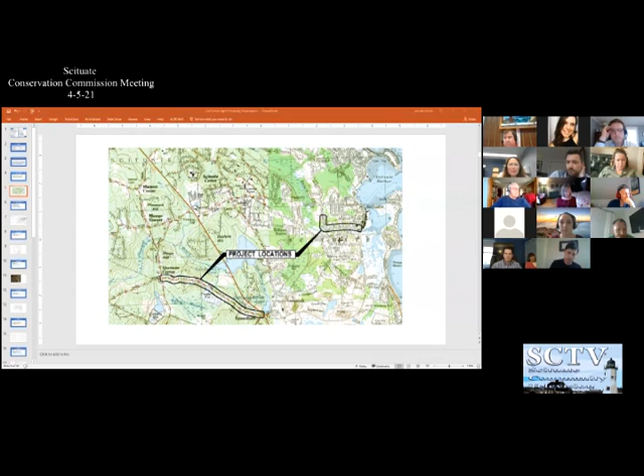I think I saw Jeff. Oh, Jeff, there you are. Oh right, thanks Amy. Jeff Hassett here with Morse Engineering, here on behalf of the applicant, Stephen Connolly.

As you noted, this is a continued hearing for an RDA for 215 Tilden Road. Since the last meeting on the site plan, we noted the existing buildings to remain, and then also extended the wetland line towards the easterly property line. That wetland line did come closer to the work than we originally had.

The work in the 100-foot buffer includes 3 sonotubes associated with the deck on the back of the house. A corner of the garage is partially in the 100-foot buffer, and the septic system is within the 100-foot buffer. I'll note that all work is within areas that were previously disturbed. There's no work within the 50-foot buffer, and along the limit of work, there will be a 12-inch diameter mulch sock.

Okay. Penny, I think you're anxious to discuss this. I just feel it's so. Go ahead, okay I'm up.

Yes, it's changed. This whole project to me has changed from the first time it came in. I now have changed my feelings completely on an RDA, because the whole septic is in the 100-foot buffer, which is our jurisdiction. I know it's local, but it is ours. I was shocked, to be honest with you, how much the line changed. So that's about all I can say. I am not happy with this as an RDA at this point. I'm not comfortable with it. That's it.

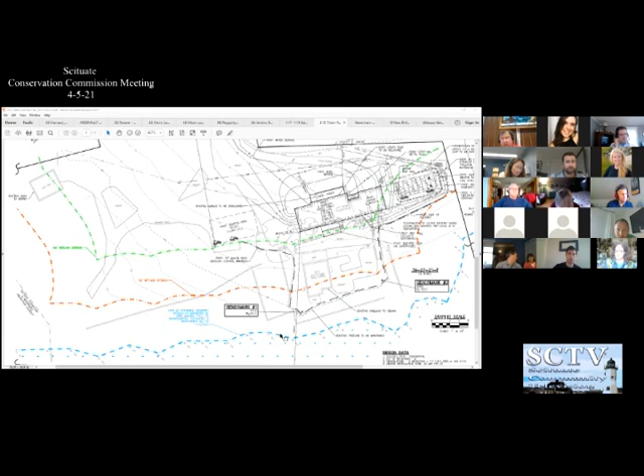25 Harvard Street, April 5th during the 5:30 meeting, the Town of Scituate Conservation Commission will act on the request of Kevin Arsenault for a determination of applicability of the Massachusetts Wetlands Protection Act and the Scituate Wetlands Bylaw for activities related to installing a fence and landscaping at the property known as 25 Harvard Street, Scituate. Abutters and other interested parties are invited to attend. Information and access to virtual meetings is available on the agenda posted on the town website.

So this is Atlantic Coastal.

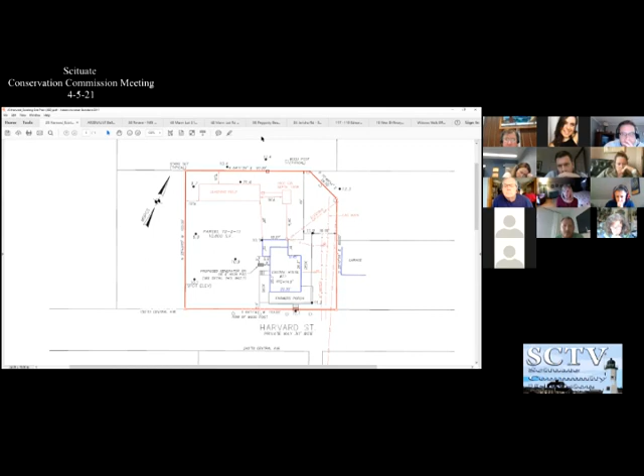Could you scroll to the second sheet that shows the proposed landscaping? It was there, but it went away. There it is, oh, there it is.

There's all kinds of wonderful plants here. Love is the expert on the plants. Love, are you on the call? Can you hear us? I am here, can you hear me? Yes, great. Do you want to talk through this qualitatively on some of the plants and the layout, and then we can open it up to questions from the conservation commission? Sure, I'd be happy to.

The Arsenaults are new owners of this Humarock property. What exists there now is, across the front, some leftover rugosa rose. There are two nice trees, one a Juniperus virginiana and the other a Pinus rigida, and they're quite lovely. There's some Prunus maritima, which is really nice, but everything else is basically just weeds, as well as burning bush and oriental bittersweet. So they want to keep it very beachy and very appropriate to the area.

The fencing that was proposed at the back right and also along the left property line has currently been eliminated. They want to see what their new neighbors to the left are going to do first, and they didn't want to feel like they were walling them out — they're actually really nice people. They want to add some Juniperus virginiana at the back, which will help screen their view to an area where there are 10 to 12 parked cars most of the time. The area behind them to the left is already wooded, primarily beach plum and Juniperus virginiana.

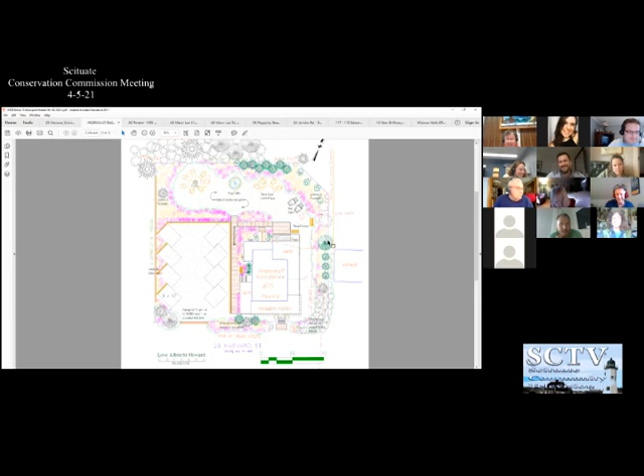Good luck with your project. Thank you very much. Can I say one thing to Doug Aberg? Sure, okay. Doug, we've never met, I just wanted to say hello. Thanks, that was it - I was going to wonder if you caught on that was me, with a voice. Thank you, everyone. All right, thank you, have a good night. Have a good night. I've got fans everywhere. I guess you do. Ooh. Wow. I was wondering what she was going to say. I was scared for a minute.

Zero Glades Road, April 5th, 2021 hearing, at Town Hall, the Scituate Conservation Commission will act on the request of Kevin McGovern for a determination of applicability of the Massachusetts Wetlands Protection Act and the Scituate Wetlands bylaws for activity related to removing two structures at property known as Zero Glades Road, Scituate, Mass.

Abutters and other interested parties are invited to attend. Information to access the virtual meeting will be available on posts on the town website.

Do we have any kind of a sketch or plan for that, Amy? Here we go. Okay, and who's presenting this? I was looking for Kevin. I think he's a traveler, potentially. There he is. Great, hi Kevin. You're muted - hold on, you got it. Oh, hold on, unmute. Oh sorry, I think I muted him. Give us one second. How about now? We got you.

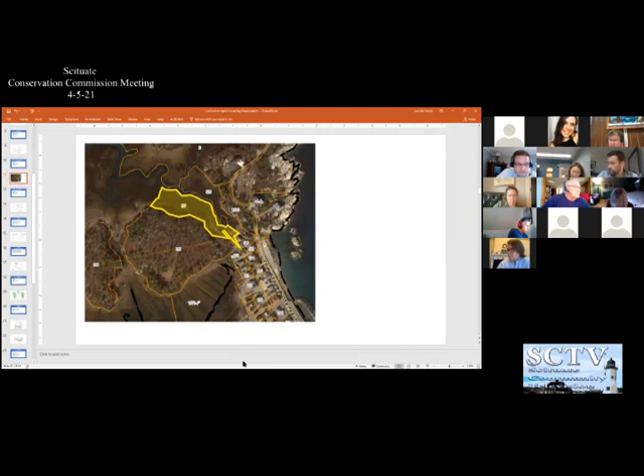Okay, 22 Salt Meadow Lane. During this 5:30 meeting of the Town Hall, the Scituate Conservation Commission will act on the request of Leo McDonough for a determination of applicability of the Wetland Protection Act and the Scituate Wetlands bylaws, for activity related to bringing fill to level a boat storage area on property known as 22 Salt Meadow Lane, Scituate. Abutters and other interested parties are invited to attend. Information to access the virtual meeting will be available on the agenda posted on the town website.

Who's on for this? Anybody? I'm looking for Leo McDonough. If he's on the call, can you raise your hand? Otherwise I can just quickly go through what's on here, it's pretty straightforward. Somebody's raised their hand. We got Mr. McDonough, can you see him? This is Jody.

Yes, so good evening. I apologize, I'm not at home, so I'm not on my computer. Sure. Why don't you explain to us what you want to do, Mr. McDonough? Sure, so I've had this property, the two lots, one house, about 15 to 16 years.

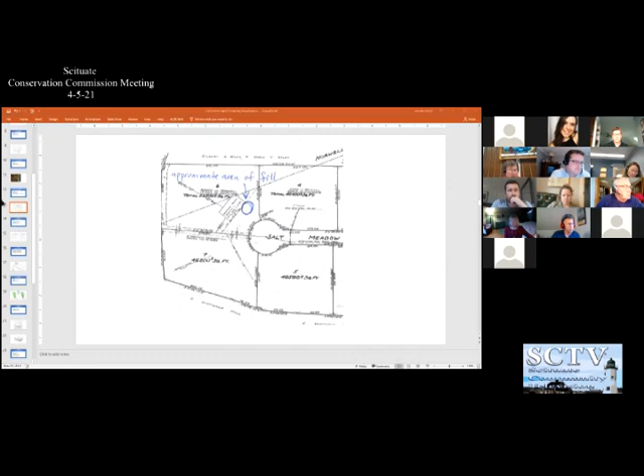Into the NOIs. 117-119 Edward Foster. On April 5th at 5:30 at Town Hall, the Scituate Conservation Commission will hold a wetlands hearing under Chapter 131, Section 40 of the Massachusetts General Laws and Section 30700 Town of Scituate Code of Bylaws, regarding the application of the Town of Scituate for work related to extracting 20 existing mooring piles, anchoring the maritime center floats, and replacing with 26 new steel pipe mooring piles at location 117, 119 Edward Foster Road, Scituate. Abutters and other interested parties are invited to attend. Information to access the virtual meeting is available on the agenda posted on the town website.

Okay, looking for GEI to raise their hand, and Stephen Moan. Okay, you're all. Who have we got on? Host is not allowing me on. There he is. Are we there? Somebody, I can hear somebody. Yeah, we control the mute, so. He's down the bottom of the screen, and he's muted.

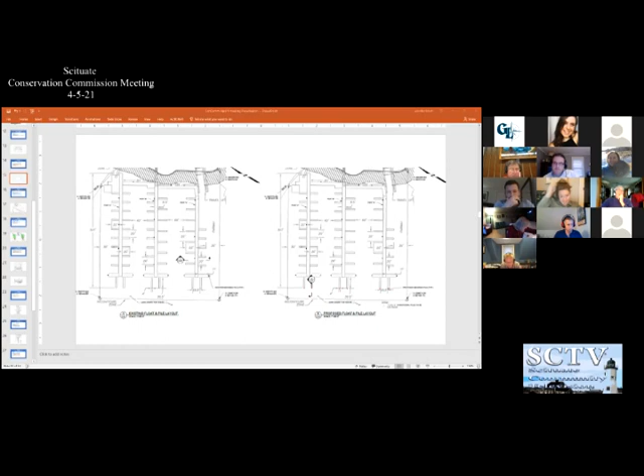On April 5th, 2021, the Town Hall Scituate Conservation Commission will hold a wetlands hearing under Chapter 131, Section 40 of the Mass General Laws, Section 30700 Town of Scituate Code of Bylaws, and Section 32050 of the Scituate Stormwater Bylaw regarding the application of the Town of Scituate to repave the parking lot and associated landscaping at location 250 Driftway, Scituate. Abutters and other interested parties are invited to attend. Information and access to the virtual meeting will be available on the agenda posts on the town website.

So who do we have? That's Cavanaro. Yes, Brendan Sullivan here. Hey, Brendan. Oh, I thought they were going to continue. Go ahead, Brendan. We do have the updated plan up.

Brendan Sullivan with Cavanaro Consulting, representing the Town of Scituate, the Widow's Walk Golf Course. We were in here with you guys at the end of last year for improvements to the clubhouse, and said we were coming back when we redid the parking lot. Well, now we're coming back to redo the parking lot.

So the parking lot is basically a combination of pavement, old pavement, and some hard pack gravel. In conjunction with redoing the clubhouse, we're going to grind and repave the parking lot, really not changing the grades that much, other than the grinding of the existing pavement and the new pavement going on top of that. What we did include on the original plan was...

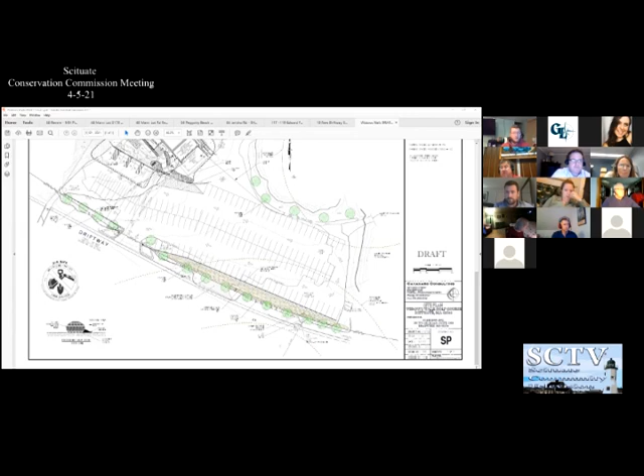13 Circuit Ave. On April 5th, 2021, at 5:30, Town Hall, the Scituate Conservation Commission will hold a wetlands hearing under Chapter 131, Section 40 of the Massachusetts General Laws, and Section 30700 of the Town of Scituate Code of Bylaws, and Section 32050 of the Town of Scituate Stormwater Bylaw, regarding the application of Derek Delmonico to raze and rebuild a single-family dwelling with attached garage, asphalt driveway, and lawn area at 13 Circuit Ave, Scituate. Abutters and other interested parties are invited to attend.

And we have Scott Panera here. Good evening, this is Scott Finara with Grady Consulting, here on behalf of Derek Delmonico for notice of intent for raze and rebuild. On the left side of the screen, that's the existing conditions of the property. There's an existing single-family house and driveway. The property does abut Scituate Harbor, which has a coastal bank. Part of this work will be within 100 feet of that resource area.

So again, it's just a raze and rebuild. We have submitted an administrative stormwater review for low impact projects, which has been peer reviewed by Merrill, and we have addressed their comments. There's a stormwater system to the rear of the house, just below the patio on the right side of the screen. We're proposing erosion control in the form of a silt sock around both the left and right side of the property, as well as the rear where the work will stop. Are there any questions?

Who wants to lead off? Jen? I'm still looking at it, but my first thought is there's a pretty big uptick in impervious surface. Can you say what the actual percentage is? Yep, I believe there's a table on the right-hand side above the revision block. But essentially, the entire increase in impervious coverage will be managed by this new stormwater system.

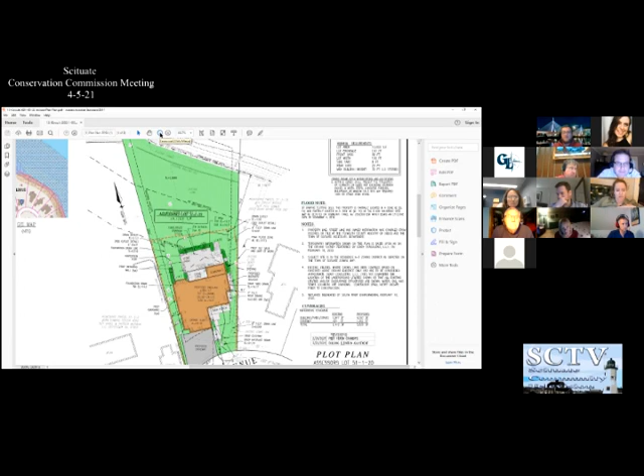Okay, it looks like Derek and Tracy have their hand raised. They might be able to input. Well, why don't we go through members first, and then we'll have public input and the owners. Let's just work through that one. Okay, that way we can hear from all the members. Okay, all right. Andy?

I think Jen's point's well taken. But otherwise, it looks like they pretty thoroughly responded to the concerns I saw in the peer review. So I'm good otherwise. Okay, Brendan?

Yeah, I'm also concerned about that's a large increase, but Jen kind of really did that. Not overdid it, but like she covered it completely. I meant covered it completely. She just - I took the bullet by going first. Okay, Penny?

I have a question here. In the back there it says stone patio, but what's that staircase? Is this a raised deck or a stone patio out back? Yes, it's a raised stone patio. So there's steps down from the first floor elevation onto that stone patio, and then beneath that is the proposed infiltration system.

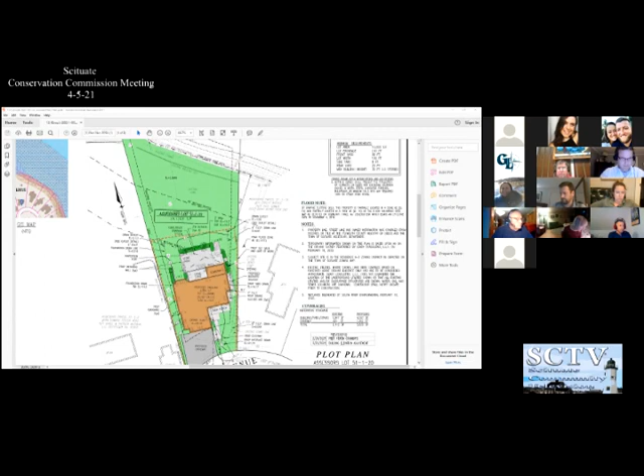So on April 5th, 2021, 5:30 p.m. at the Town Hall, the Scituate Conservation Commission will hold a wetlands hearing. Hold on, 10 Driftway, 10 New Driftway. Right, it's probably out of order. Sorry, and this is out of order on the slideshow, but on the agenda we're doing 10 New Driftway first.

So, we are looking for Morse. Is this a new one? No, it's continued from the 1st of March. Oh, okay, that's why I don't have anything to read. Sorry, 10 New Driftway, of Ross Engineering. I thought they were going to... It's Ross, I was thinking it was Greg Morse. It's Ross, you're right, sorry. I don't know why I was so confused. Too much going on.

Good evening, Mr. Chairman, this is Greg Tansley. Can you hear me? I can, Greg. Go ahead and turn it. Yep. Greg, if you want to start your presentation.

Sure. What we have here, as you can see, there's an existing retaining wall that runs right along this line. That retaining wall is in great disrepair. It's an old Versa-Lok retaining wall. It's been hit by traffic and cars parking a number of times. What we're looking to do is remove this old retaining wall that's really in bad shape.

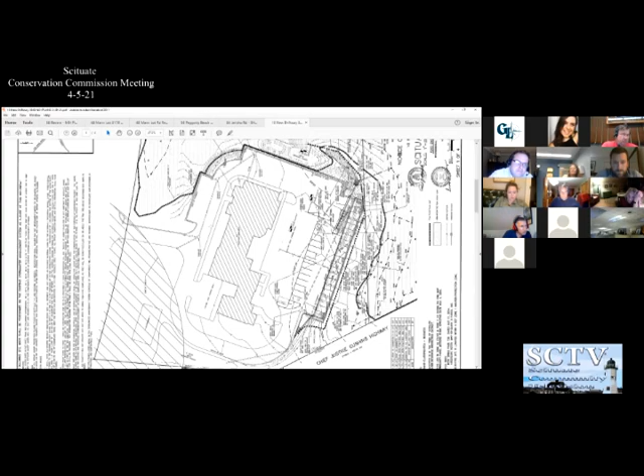If you see on the plan, there's a 1 with a circle in one of the stalls, and that goes up to 15 with a circle in one of the stalls up by the new island. That's a row of... Now I can see what you're doing. Yeah, so that's one new row we are proposing for new parking. And then if you look to the south, there's a 16 in one of the parking stalls in the lower corner, and then we go all the way up to 35. But there is existing parking along that edge already, so it's...

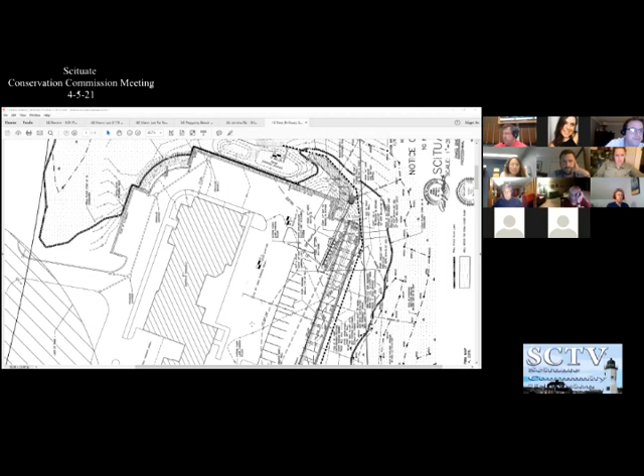38 Revere Street. On April 5th, 2021 at 5:30 p.m., the Town Hall Scituate Conservation Commission will hold a wetlands hearing under Chapter 131, Section 40 of the Mass General Laws, and Section 30700 of the Town of Scituate Code of Bylaws, regarding the application of John Ison for building an accessory dwelling on timber piles located at 38 Revere Street, Scituate. Abutters and other interested parties are invited to attend. Access to the virtual meeting will be available on the agenda posted on the town website.

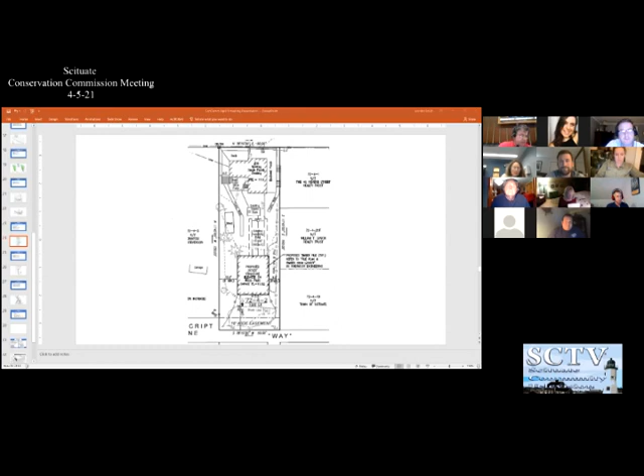Good evening, this is Morse Engineering. Yep, this is Greg. Sorry Greg, I thought you were on the other one, but I was confused. Not a problem. For the record, this is Gregory Morse, registered engineer, Morse Engineering, representing the property owner John Ison, on the notice of intent located at 38 Revere Street. The notice of intent is associated with the construction of a detached garage at this property.

The existing property, shown on assessor's parcel 72-4-2, is approximately 7,500 square feet in size, represented by the thick black line, that's the rectangular shape on the plan. At the top of the page is Revere Street, at the bottom is Postscript Lane. At the Revere Street end of the property is the existing home, number 38. The site is located not only on a barrier beach in Humarock, but also in land subject to coastal storm flowage, FEMA zone AE 13. For reference, at the Postscript Lane end of the site, the topography is at elevation 15. At the Revere Street end, the elevation is approximately 11.

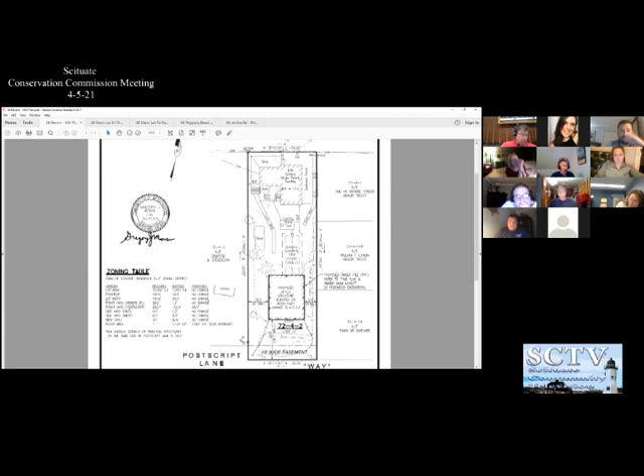The proposal is to construct a detached garage, 26 feet wide by 32 feet deep. That's the bold rectangular structure at the bottom third of the page. It would be an elevated structure on timber pilings. We submitted a piling layout prepared by Rivermore Structural Engineers. We've proposed a first floor elevation at 15.5, which is above the FEMA floodplain elevation of 13. The DEP had no technical comments and has issued a DEP file number. This project also went to the Zoning Board of Appeals and received unanimous approval. I'll turn it over to you for question or comment.

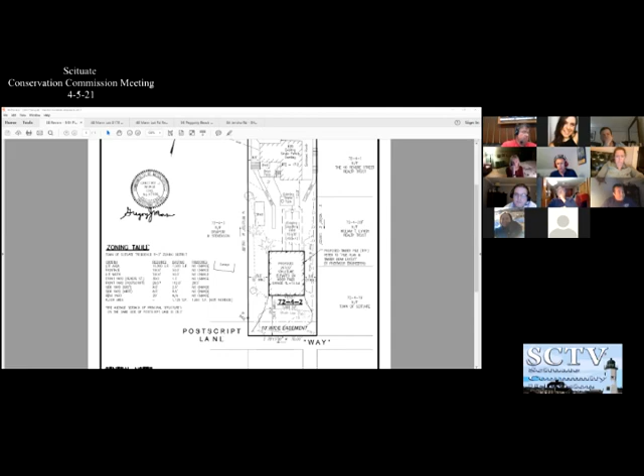Thanks Greg. The speaker admits they wish they had those plans and didn't realize they were missing. They note this is barrier beach, coastal dune, land subject to coastal storm flowage, and suggest they could close this pending the structural plans.

A question is raised confirming this will be an accessory structure, and whether there's an additional connection to the septic system, and if there's enough capacity to handle extra flow. It's clarified there's no increase in flow since no bedroom is proposed; this is a single family home attached to the septic system and this does not add bedroom capacity. They've been in touch with the Board of Health, who are comfortable with that.

Regarding the structural plans, the speaker says he understood they had them, but in case not, he just emailed them to both the reviewer and Jen Smith. This is acknowledged with thanks.

Craig asks how people accessed this property before, noting the house fills up all of Revere Street, and whether people just park on the street. It's explained that they come in off Postscript Lane, where the proposed area is currently a barren gravel surface, and they already park in this location.

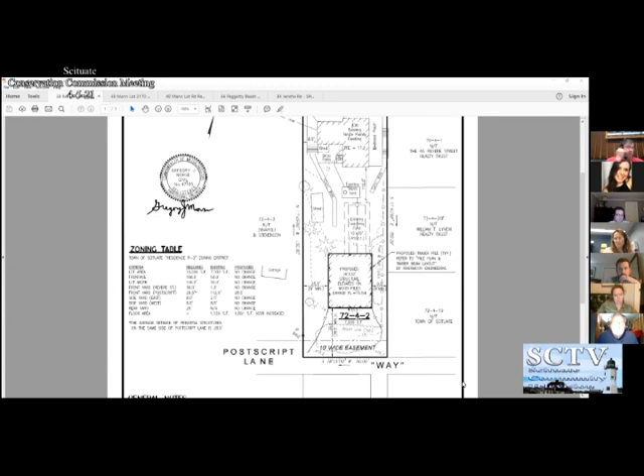The one that would be really natural is on what I think is marked as a 10-foot strip. There's already some vegetation there. We would want to keep as much of the bayberry bushes, how to describe it, to the right, just above the word way, if we can, and maybe have it sweep in and extend it. You can see there's some posts along there. That would be a natural place to put some bushes or move them if we can.

Well, I think if we agree to close this, John, then part of one of the orders would be that we'd come up with a planting plan that the commission could agree on. Yeah, I'm sure we can. Okay, yeah, that was good. Great, thank you. Okay, anybody else?

We need a motion. Make a motion to close, and we'll be expecting a planting plan. Okay, we got Penny, do I have a second? I'll second. Richard. All in favor? Doug? Yep. Jen? Yes. Andy? Brendan? Yes. Frank, yes. Thank you very much. Good luck with the project.

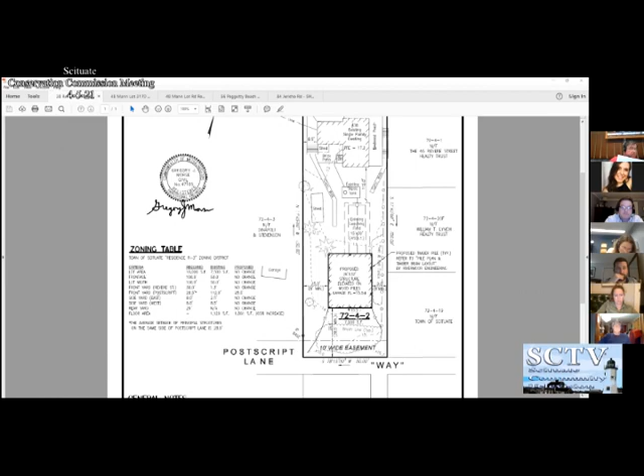84 Jericho, Scituate Harbor Yacht Club. On April 5th, 2021 at 5:30 p.m. at the Town Hall, Scituate Conservation Commission will hold a wetlands hearing under Chapter 131, Section 40 of the Massachusetts General Laws and Section 30700 Town of Scituate Code of Bylaws regarding the application of Scituate Harbor Yacht Club for work related to replacing existing timber pier, decking, and handrails located at 84 Jericho Road, Scituate. Abutters and other interested parties are invited to attend. Information to access the virtual meeting will be available on the agenda posted on the town website.

Good evening. Again, for the record, this is Gregory Morse, registered engineer with Morse Engineering. Also with me on the call tonight is attorney Steve Gard. We're here on behalf of the Scituate Harbor Yacht Club for a notice of intent to replace their timber pier. The plan that we submitted depicts the pier as it extends out from the land. It's approximately 240 feet in length, extends out into Scituate Harbor, and it's used for access to their marina and dock facilities. This area is located in land subject to coastal storm flowage.

It's a velocity zone at elevation 16. The pier that's out there today is in poor condition. We submitted a photograph on the plan here, the photograph on the left. You can see the existing timber piers. The pilings are starting to rot in several locations. There's been cross bracing added through the years to help alleviate that concern. But it's really gotten to the point where it's time to be doing a replacement project. There's an existing Chapter 91 license for this pier in place, and so the proposal would be to replace it essentially in the same location.

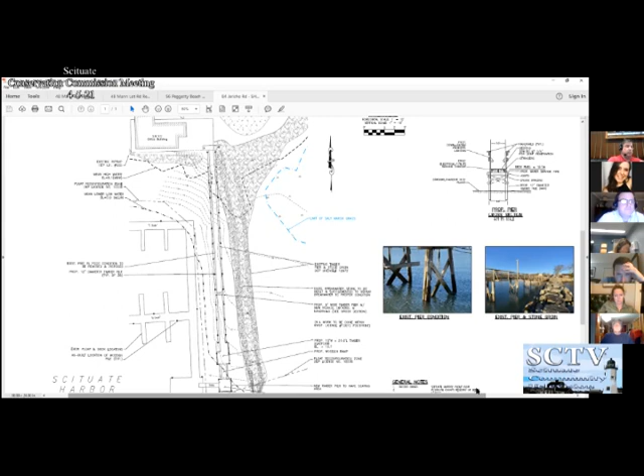The proposed layout is overlaid over the existing in the plan view here, and you'll see that it is generally in the same location, though slightly wider. The existing pier is 5 feet in width. Our proposal is to bring it up to 7 feet, which allows for handrails and ADA compliance, with minimal impact on the wetlands beneath it.

The existing pier is constructed on what they call bents. The pilings were driven in at an angle, so on the ground in the mud they take up an area of 8 feet in width. Our proposal would be to use vertical timber pilings that are 8 feet, rather than the bent layout previously used on this project.

There are 36 pilings out there today associated with the pier. The proposal would be to replace it with 36 new pilings, 12-inch diameter, driven with a vibratory hammer. The work would be performed with a crane and barge setup, similar to when the pilings were driven for their marina and dock facilities.

The DEP did not have any comments and issued a DEP file number on this. We did receive a letter from Division of Marine Fisheries, which we would expect to be included as a condition if this project were approved. This is our first step in the approval process. We would also have to go to the Army Corps of Engineers as well as DEP Waterways after obtaining a local order of conditions to wrap up this project.

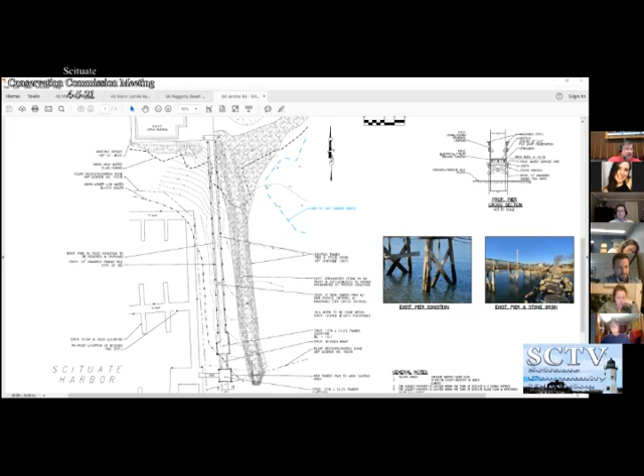Andy? You're muted, Andy. Did we mute Andy or did he mute himself? There we go, I'm okay for right now. Thanks. Brendan? Hey Brendan, sorry about that. Yeah, I have no questions for this.

Okay, Jen? Yeah, this definitely sounds like a much needed project, so it will probably be great for the area as well.

Penny? She's muted. Penny? I'd move on, she looks like okay, her off camera too. Doug?

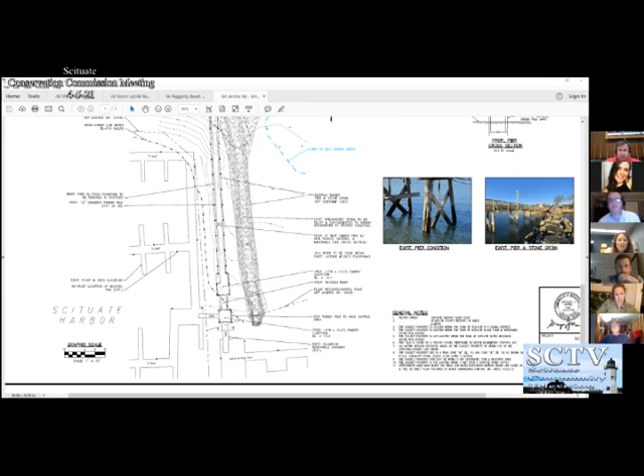No questions at all. Some curiosities around the logistics of building this with the barge and crane with all those existing docks and boats around, but that's not up for me. That's why you hire experts. So, no questions about the proposal.

Okay, Richard? I'd be a little interested, but not a big deal, about what fisheries had to say and if there are any time restrictions included. And in answer to Doug, probably that's why it's in the fall, because many of the boats are gone. Right.

Amy? Yeah, so like Greg said, there's a lot of other permits that are needed, primarily the Chapter 91 license and the Army Corps permit. And DEP had no comments. We can incorporate the DMF letter by reference into the orders. I think we should close.

Okay, and that is the process for this. So we go ahead and close, and then when there's feedback from like fisheries or something, do we? Well, we have the feedback from fisheries, but if there's feedback in the layout design, say waterways, then they would submit to us the revised plan. But they need our orders in order to proceed further.

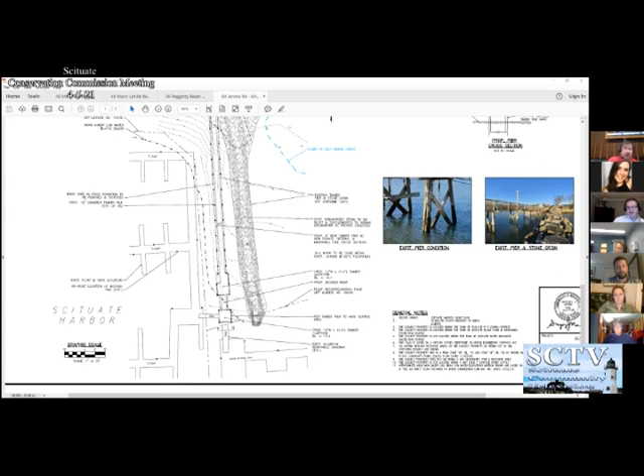And now we have 56 Peggotty Beach. 56 Peggotty.

On April 5th, 2021 at 5:30 p.m. the Town Hall, Scituate Conservation Commission will hold a wetlands hearing under Chapter 131, Section 40, Mass General Laws, and Section 30700, Town of Scituate Code of Bylaws, regarding the application of Stephen and Stephanie West for work related to construction and an addition, installing pools, landscape, and dwelling at 56 Peggotty Beach Road, Scituate. Abutters and other interested parties are invited to attend. Information and access to the virtual meeting will be available on the agenda posted on the town website.

And this is Morse Engineering.

Good evening. For the record, Gregory Morse, registered engineer, Morse Engineering. With us on the call tonight are the property owners, Stephanie and Stephen West, as well as Alyssa Jones, the architectural designer, and Tricia Van Buskirk, the landscape architect associated with this project. The project is located at 56 Peggotty Beach Road. It's a notice of intent for construction of additions to the home, a significant landscaping project with plantings, and construction of a pool.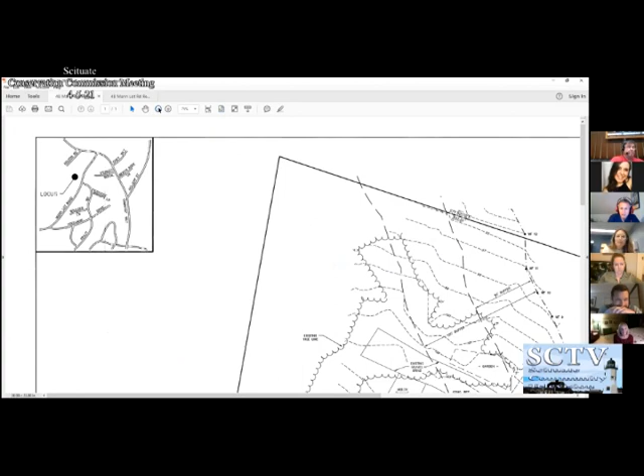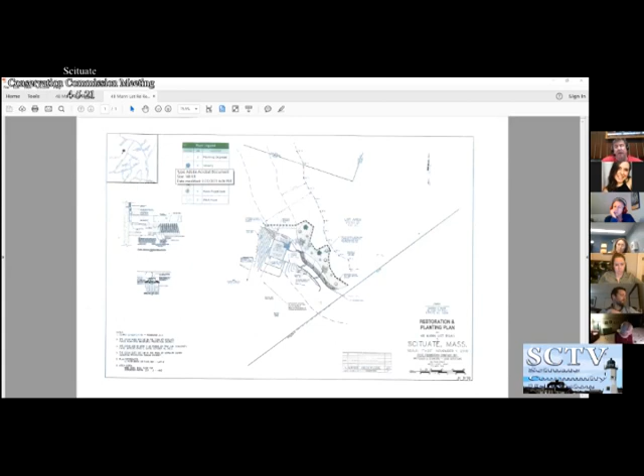So we conditioned a project about 15 years ago with a restoration plan. Part of that was never completed. The applicant owner came in for COC and discovered that wasn't done. We went out to the site and found inconsistencies with the plan and the lack of restoration. So the applicant put out a new restoration plan, which has a greater area than the old one. To me, it seems like it would work.

Just wondering if anybody else has any questions or comments. Let's take a motion to accept this new plan. I'll make a motion that we accept this new planting plan on, what's the address? It's 48 Mann Lot. So I have a motion from Penny, seconded by Brendan. All in favor?

Can I ask one quick question? Are they actually restoring wetlands? I think there's a combination. Yes, some of the restoration is an active wetland area. Okay, all right.

So I had a motion from Penny, a second from Brendan. Richard? Yes. Someone has their hand up - is that Grozier? This isn't a hearing, so we're just doing this as an administrative item. They're not speaking. So I have Richard, yes, that's right. Doug? Yes. Jen? Yep. Andy? Yes. Brendan made the motion. Frank, yes. Okay, great, thank you.

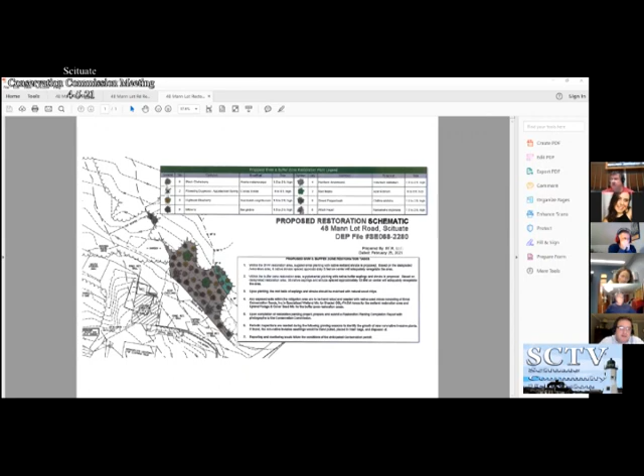Do we want to, what else do we have now? We have town meeting next week, Monday. Adjourn. Amy, do you want to allow this person or see what this is? Okay, it's not on the agenda. But whatever, who are they? Whatever, it's been 5 hours.

Hi there, this is Amy Rozier. I'm at 72 Kenneth Road. I just sort of wanted to go on record regarding the property at 33 Oceanside and make sure that you all understand that there's stuff that's been going on as recently as this weekend, and see if there's an update as to what's going on there. I don't know if this is the correct forum for that. It's a public meeting. So have you contacted the office about that, Amy?

Yeah, so we have received emails. This is the one with the superseding order of conditions being handled by the state. So you know that, Amy, right? Did you also contact the state, since this has the superseding order? Correct, but I'm not getting a response from Greg either. Well, I guess I'm just trying to figure out who has oversight on this, because the DEP isn't showing up in the neighborhood, and it's been 6 months since he had a cease and desist. To my knowledge that hasn't been lifted, but he installed sod this weekend, up to the point where his plan is to replace the rock wall that they made him take down in September.